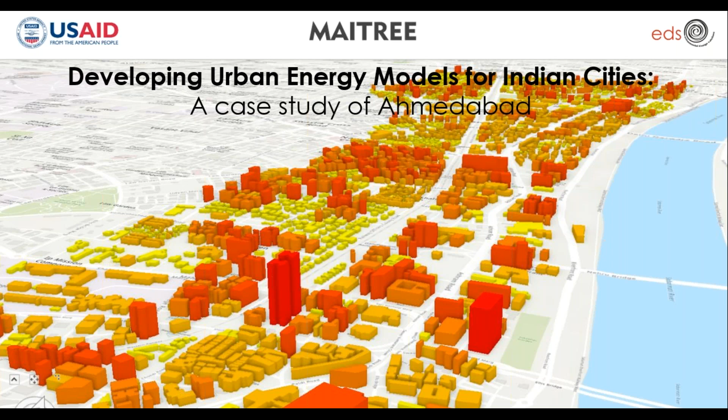Urban energy models, or UEM, are critical data-driven tools to support energy efficient, climate resilient city planning and its operations. They also play a key role in assessing the decentralized renewable energy generation potential within the city, which in turn helps design and operate net zero neighborhoods.

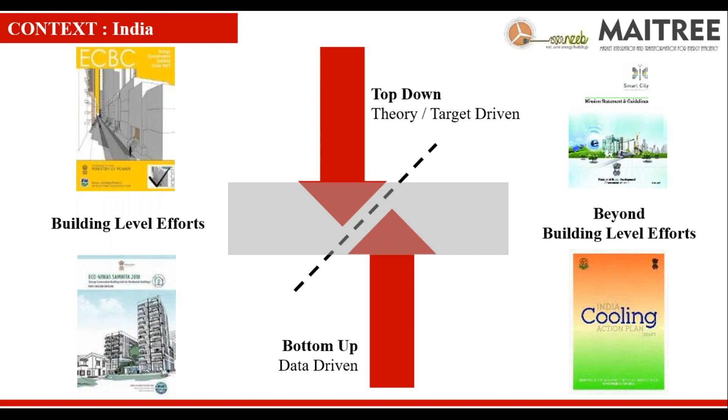At the same time, many of us are also involved in building energy efficiency, net zero cooling. It's trying to sort of bottom up. But many times it happens that top down and bottom up really doesn't come together the way it should. And that's where the gap is. And that's where probably the work which is happening at CEPT, not just in the building energy domain, but many other work, whether it is heritage or transport or water and sanitation, a lot of work where we try to bridge this top down, bottom up, and try to align them in a manner so that we get comprehensive outputs.

Some questions here just to start with, and just to understand where the urban energy model and the work fits in. Do we know how much energy we typically consume in buildings, especially in India? And the answer is sort of yes, we fairly know how much we really consume at the building level. Do we know what is the impact of building energy code at the city level? If I explain that a little bit more, how much carbon emission can be reduced if we implement ECBC or ENS in the city of Ahmedabad or Jaipur or Delhi? Do we know how many buildings we have in a city and what kind of buildings these are? How do they get operated?

If I get a chance to implement a code today in one city or two cities, do I know how many officers are required, how many buildings are coming up which will fall under the purview of ECBC, and per day I need to give a permit to 5 buildings or 10 buildings, or per year I need to give a permit to 200 buildings, and for that I will require about 10 officers?

Or also, do we really understand what is the implication of a code on the regional economy or local economy? I mean, how many people will come forward and start selling insulation or cool roof or even double glazed windows? How many processing units will come in and around Ahmedabad, an industrial area, who will supply a good amount of material to the buildings which are getting complied with the ECBC, and how many carpenters will upgrade their skills, and so on and so forth. So there are a lot of questions which come up when we start looking at the real implication of code in reality.

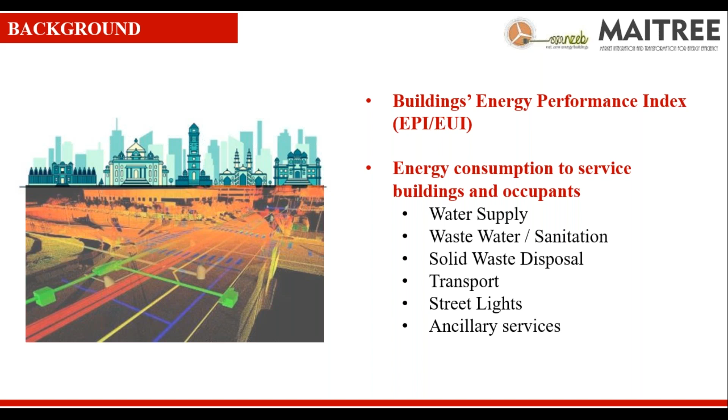But it is not as simple as just converting kilowatt hours into rupees or backward calculating to know how much we are using. It's a little bit more complex than that. And why we need to do that is because cities are still growing. We haven't reached the plateau where we are not expanding our cities, and in fact there are a lot of cities which are also going under urban renewal.

Mumbai is an area where mill lands went into the second incarnation of cotton mills. Now we have huge complexes. Even in Ahmedabad there are certain areas, and many cities across the country are getting urban renewal plans. How do we really operate the cities or municipal services so that we reduce the cost? Forget electricity for a while, but just to reduce the economic cost burdening the municipal corporation, how do we start operating the cities with better services?

And also, I think there are 6 or 7 groups in India who started talking a lot about district cooling systems and so on. And most of the approaches and reports we see are sort of top-down whenever they're trying to make a case for district cooling. Whether it is a small city or large city, irrespective of typology, people do start preaching about district level energy systems. Probably we need to carefully look at all of those.

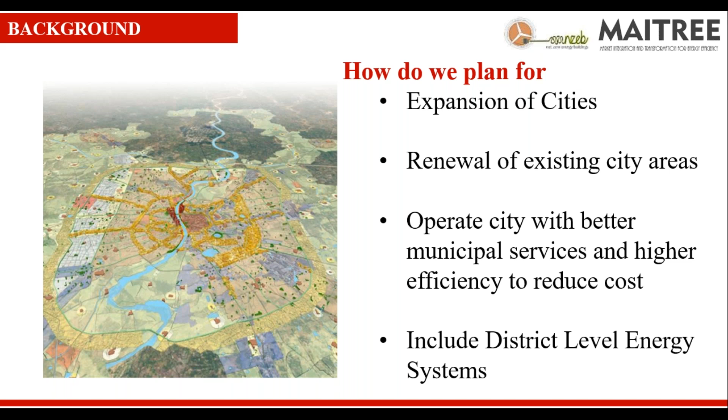As you know, the spatial parameters of cities vary a lot. Urban form in Mumbai is linear, more or less. Delhi is altogether different. A city like Chennai, or those more on the coastal region, have a different kind of urban form. Their morphology is different. The kind of people and habits they have is very, very different.

I won't name an area in Delhi, but at one point somebody was saying that about 700 or 800 liters of water per person per day gets used in one part of Delhi. And on the other side, you just have 35 or 40 liters per day per person. That's the sort of diversity and variation we have. And how do we really service these neighborhoods? Geographical factors are different. Some are flat, some are terrain.

Somebody was telling me that at one point in Mumbai, they were not using pumps to supply water to the colonies, because engineers very early in the development of Mumbai located the water tanks at the neighborhood level high on the plateau, and through gravitational force, the water used to reach even the second or third floor in some neighborhoods. So a lot of these things have an impact on the energy consumption of cities.

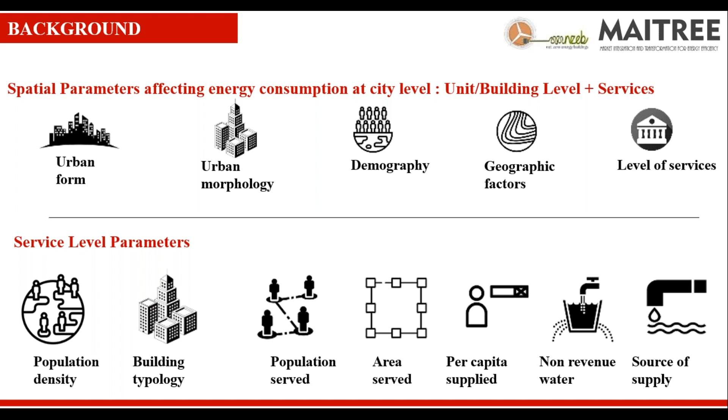Ahmedabad does get water from Narmada and a few other reservoirs, but at the same time, peripheral areas of Ahmedabad do pump groundwater, and that also consumes a reasonable amount of energy. So how do we really account for all these things when we start talking about energy at the city level, energy at the neighborhood level? It's a reasonably complex process.

The urban energy model is basically a computational modeling and simulation of energy performance of either a group of buildings or a number of buildings in urban context. It accounts for their mutual interaction, not just the radiation models, but also how microclimate is going to affect it, and how the urban service infrastructure is playing a role in servicing these buildings.

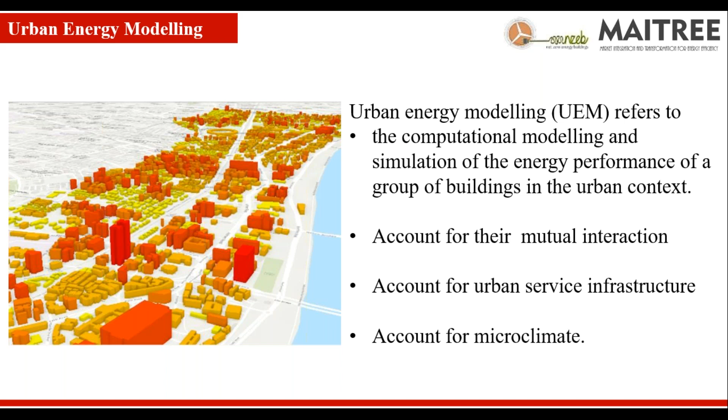And there are 2-3 words people use. One is urban energy model, one is urban building energy model, UBEM, which is primarily to look at just a group of buildings and the interaction between them. But we prefer to use the word urban energy model because we also take urban infrastructure and urban services into account.

And again, this is the kind of work where you can see whether it is a top-down approach where you just look at the market, the economics, the statistics. So there are a lot of proxies which you can use to develop an energy model, whether it is population or local economic growth. Sometimes these are black box models as well.

And if you start looking at physics-based simulation, at the interaction between envelope and HVAC systems, and water supply and water disposal systems, you get a sort of bottom-up approach where a detailed representation of each system and their constitution takes part in an aggregated whole building or whole system level, which is more suitable for urban and regional analysis.

The reason for that is that many times we do not have access to information about the local economy. If I really want to understand the growth of Ahmedabad in terms of economics, it is very difficult to find. At the state level you may get that number, at the national level definitely, but at the city level it's hard to get those numbers. Or even if I want to understand how many air conditioners got sold in Ahmedabad in the last 45 days, the newspapers are saying something, but whether you want to rely on that or not is a different case.

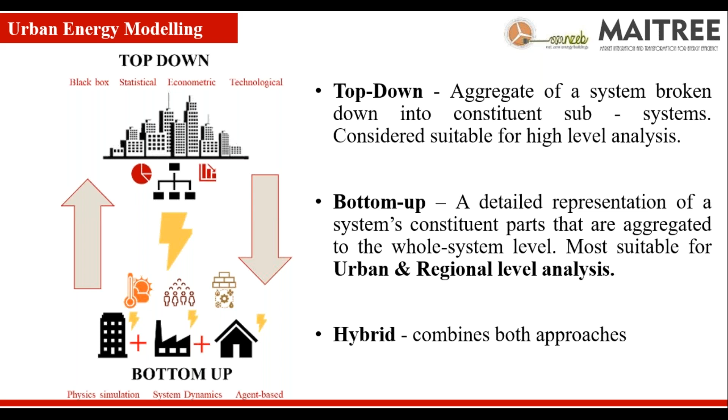While we were doing this, we looked at 85 projects, and this is where my colleague Anmol did his graduation. He looked at about 85 projects, trying to understand why people use these models. About 75% of groups are using building energy models, urban energy models for energy forecasting. So what would be the requirement of electricity or energy in 2030, 2040, in the presence of climate change, 0.5 degree, 1 degree change, how the cooling demand will increase, or even looking at district cooling systems and so on.

About 17% are trying to look at it from the retrofits point of view: what if we upgrade all the HVAC systems in a central business district of one or two cities, what would be the advantage in terms of reduction in emissions, or even rooftop solar photovoltaic, what would be its interaction with the grid, or whether the economic incentives which the government is trying to put will really help the cause or not.

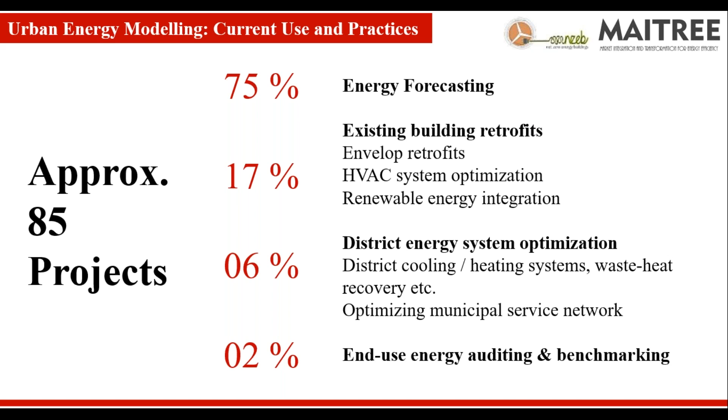About 6%, as I mentioned, were looking at district energy optimization, whether district cooling or heating systems, waste-heat recovery, optimization of municipal networks, and about 2% of them are just trying to look at benchmarking, which I feel is a heavily underused capability. It is very much possible to come up with a benchmarking exercise based on an urban energy model. I'll not talk about that project, but we have started working on urban level benchmarking using urban modeling.

And these projects are more or less across the world, except for Africa, Australia and probably Russia. You will see some of these are being followed either in Taiwan or the eastern side of China, and what we are doing in Ahmedabad. Definitely in Saudi Arabia people are working in this area, especially for district cooling systems. Europe has quite a few projects going on in these areas, and one of them is our partner, UCL.

They have developed a model for the entire London metropolitan region. And then again, on the east coast and west coast of the US, there are some projects going on. Some of them have been achieved in a very advanced stage, and all of them have taken a very varied approach. As I said, it's an extremely nascent stage of work.

So what does it entail? It's basically a database and data visualization on one side, and validation and calibration on another side. But when you want to reach that, on one side you have a model development, which takes care of what is the information you need to put inside the model, whether it is archetype development or classification of buildings, what kind of buildings they are, and how do you really calibrate the energy models of those. And I'll talk about level of details in a while.

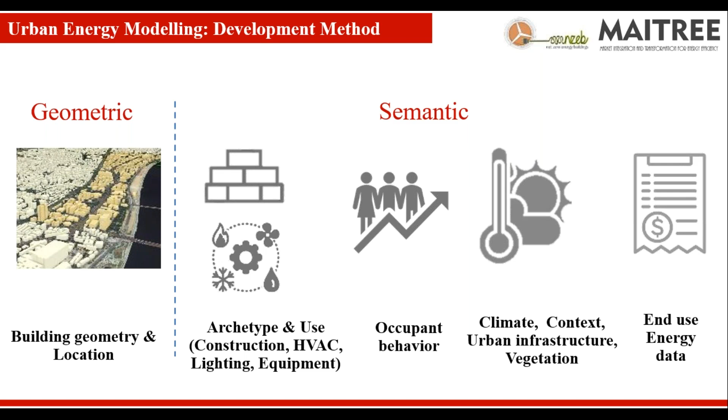In what climate you are working, is there a presence of vegetation, is there a presence of large gardens, is there a presence of a river next to you or any other large water body, and also trying to look at in the present context what is the energy use and energy use data, and that happens through survey at some point in time. So there are two big baskets of inputs, one is geometric, one is semantic, and counting all these, I'll talk about what we are doing in Ahmedabad.

The next slide is going to be very busy, so I request your attention: for an urban energy model, what is required and what are the sources from where you can get inputs. In fact, the information which I'm sharing in one slide is a work of about 4 to 5 months, and it can be developed as one full-scale PhD.

But what we are doing is looking at what is the availability of the data, what is the accuracy of data, can you really rely on that? So the lack of quality of the data, or sometimes you get data which is not usable in a computer directly, so it's not digitized data. Sometimes you do get data, but it has a privacy regulation or some kind of use restriction on that, and sometimes they are not available.

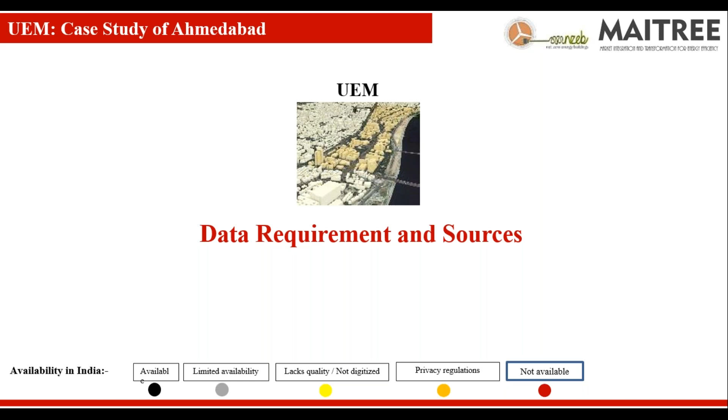So looking at what is required in an urban energy model, some examples: you can rely on Google Maps. There is a GIS portal of the Government of India called Bhuvan portal. Some voluntary organizations also work on CityGML or OpenStreetMap, or you can rely on the Estate Department of the Municipal Corporation, which has master plan documents, or urban local bodies' registers, or sometimes also state level census.

Sometimes they are available. So available data is all in black, limited availability is gray, lack of quality, where you can't rely on data, is yellow, privacy regulation orange, and not available in red. So that's one source of example.

Another source of example: a lot of projects, like USAID did the Eco3 project, where they got a number of commercial buildings' data. CEPT did a CBERD project, and also the GBPN project, which has residential data. BEE conducts surveys. So sometimes they're available, sometimes they are not, not in the best of the form which you need. There are some independent market surveys people have done, and also the TMY files or EPW files, which are available in the portal.

For geometry data, basically you rely on a geotagged GIS map, and here it is not just a plot boundary, but the form of the building. Plot boundary is still possible to get from GIS and from the municipal corporation, but what is the form of the building right on top of it? How much height does it have? All that is sort of not available.

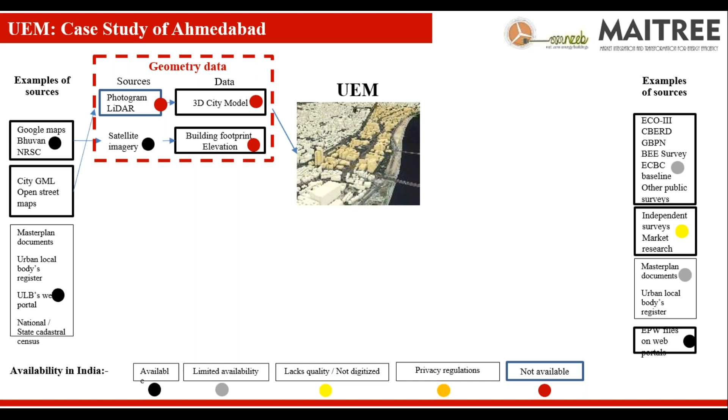So you need a third dimension of buildings when you talk about an urban energy model, because that's where the importance is. Sometimes you do get building level information about the plot size and plot area, and what is the use of that plot, whether it's a commercial building or residential building, what is the floor space consumed.

But again, that would be, I would say, more like non-spatial data. It will be more like an Excel sheet. Many corporations do have property tax data. In fact, now after the 73rd or 74th amendment, a lot of ULBs, urban local bodies, do maintain property tax data. Whether you can use it or not, it's a different case.

Energy data, definitely some of it is not available. One needs to do the survey. Utility bills are very difficult to get at scale. Yes, 200, 300 buildings is possible, but if you ask the utility to give you data at a large scale, there are a lot of privacy regulations and privacy issues there.

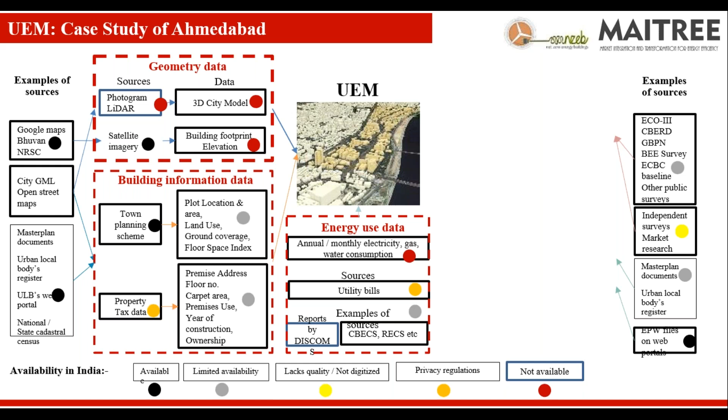Discom data at the grid level or a feeder level is possible, so at least you know when the city is hitting the peak, or when one particular grid or one particular feeder is reaching the peak, and so on and so forth. But again, it is not very much useful. It's still limited data. In terms of archetypes and building occupancy data, it's not available. One has to do a ground survey.

And urban infrastructure, I would say, especially with some of the work happening at the central level, a lot of cities have started gathering the data, whether they use that data appropriately or not. Because of the installation of SCADA systems and many other automation, a lot of data is available, primarily from municipal infrastructure or urban infrastructure.

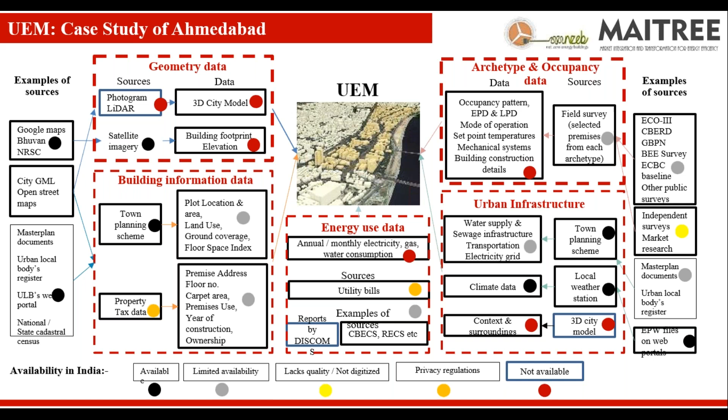So that's a reasonably busy slide, but it talks about how much is required, at what granularity you really need to have it: daily, hourly, monthly or weekly. All depends upon level of detail. At what level you need to go and work, at what accuracy you want to work. And that's where I want to spend another 2 slides helping you understand what level of detail is.

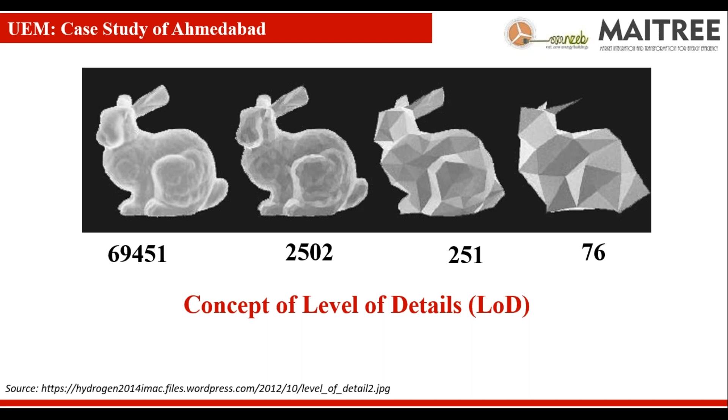So the concept of level of detail is that if you have up to 76 polygons, you may get a very rough form of something. Difficult to figure out whether it is a cat or a rabbit or some other animal. But once you start increasing the polygons, level of detail increases. That means it is easier to predict what animal you're talking about. And if you translate that into a building, we call it level of detail 1. There are sub levels of detail available, but I'm just talking about 4 high level ones.

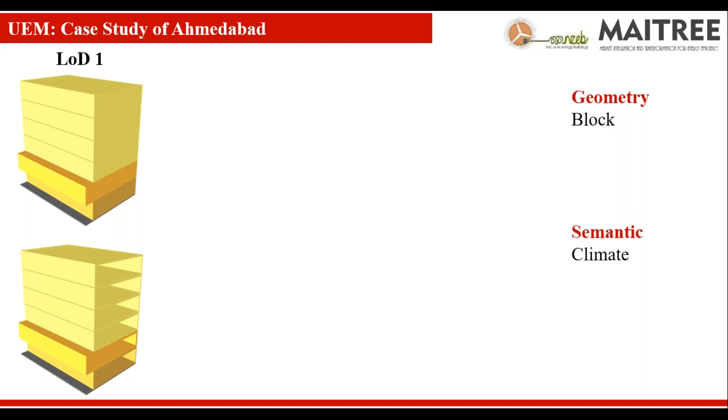When we talk about level of detail 1, and this is generally understood in the sector, when I say this particular energy model is at level of detail 1, people will understand we are just talking about a block level and climate. It does not talk about anything beyond these 2. Level of detail 2, you have a little bit more refined geometry. You know that the first 2 floors are retail, commercial, and upper floors are residential. You also know the envelope characteristics, when it was constructed, 2020, 2019 or 1980. Based on that, you can figure out what kind of construction it would be.

Level of detail 3 is where you have a little bit more understanding about occupancy. When people are occupying that thermal zone, whether it has a shade on top of it, what window to wall ratio you have. So a little bit more defined geometry, and also understanding of occupancy.

Level of detail 4, where you actually know the internal layout. You can find which are air conditioned zones, which are non-air conditioned zones, whether it has solar photovoltaic on top, and what its orientation is. So you can also find what the generation capacity would be through those renewable energy systems. That's level of detail 4, and it talks about things very much in detail.

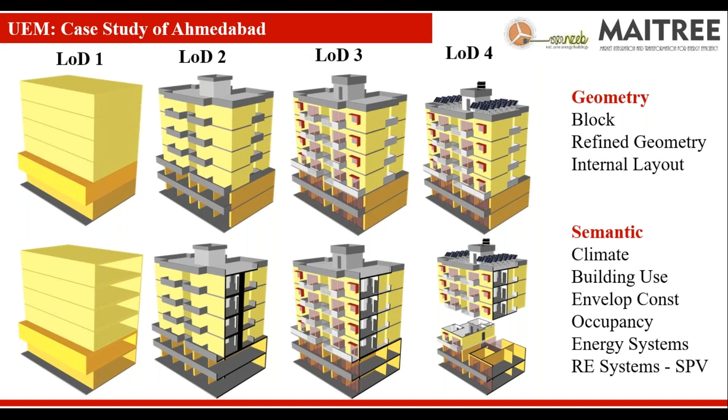Not necessarily every time you work at one of them. Sometimes some area you have level of detail 3, and sometimes level of detail 1, and still you can move forward with the studies. So for intermediate levels of detail, there's a word which Anmol used a lot, which is fit for purpose. What is your purpose and how much detail do you want? Not necessarily every time you need everything.

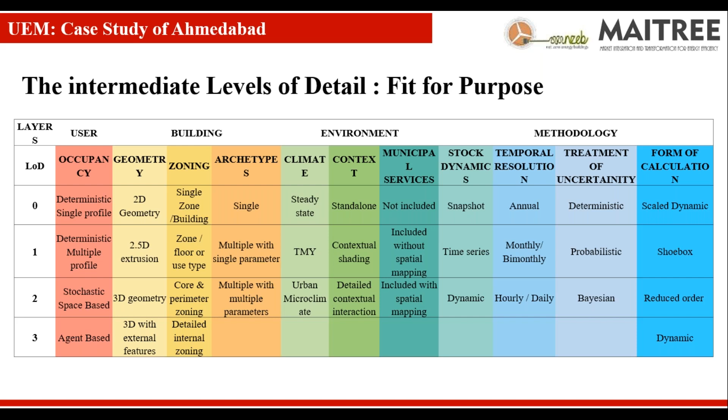If you just want to look at the urban heat island impact, you are looking at the surface temperatures only, not the internal spatial quality and so on. So whether it is a two-dimensional geometry, which is spatial, or 2.5-dimensional geometry, which is non-spatial, more like an Excel sheet or CSV file talking about the height of the building on that particular plot, that's what we call 2.5 dimension. Then you have 3 dimension, and 3 dimension with external features such as trees and other features found in the city. This is what we call fit for purpose, and what matters is what the purpose is and what level of detail you go into.

The simulation methodology we generally adopt is sometimes reduced order. About 29% of projects have adopted this so far, where it approximates the complex simulation with mathematical equations and correlations, using statistical and machine learning tools. CitySim Pro is one example, or City Energy Analyst is another example. They use reduced order models.

Then there are tools like Energy Plus, Open Studio, or Design Builder. They look at archetype-based approaches and scale up results to a total area of typical simulation. Basically, you simulate one type of building. For example, ECBC has 16 types of buildings which EDS worked out, with a baseline case, and then you apply that. You figure out how many commercial buildings you have in the city, then apply typology A to 3,000 buildings, typology B to 1,200 buildings, and so on.

So it's a sort of scale dynamic model. About 20% of projects happen on those lines. Some are also shoebox models, just at the building block level, or even at the plot level, whatever the plot boundary is becomes your building, and you look at representative zones. MIT works on this with their UMI tools. Finally, about 50%, which includes CEPT's work, is on a dynamic model that simulates each building individually with contextual effects, looking at interactions between 2-3 buildings in terms of shading, heat exchange, or radiation models.

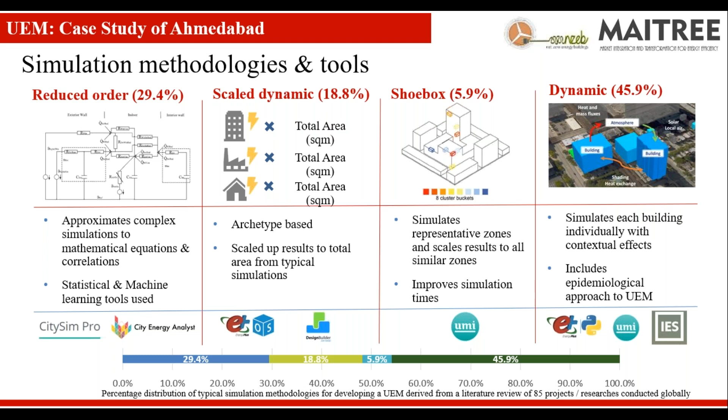One of the first tasks is to understand how many buildings you have in a city. Just a city map with plot boundaries, or even a Google map, doesn't really tell you what you want to know. You either need a photogrammetry reality mesh where you can see what kind of buildings you have—sloping roofs, high or low buildings, what material was used, including window to wall ratio—or you look at point cloud models from LiDAR, capturing the entire area through a LiDAR survey to understand the impact and kind of city you're looking at.

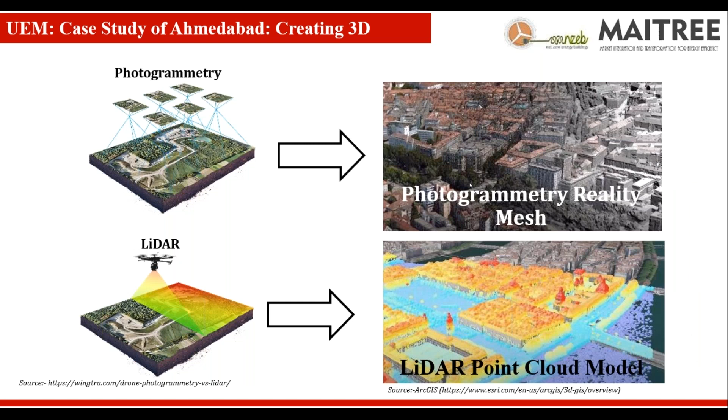What we do at CEPT is use a hybrid model between photogrammetry reality mesh and LiDAR point cloud. We fly a UAV across the city—Ahmedabad is around 400 square kilometers, not a very big city—but due to certain restrictions we can fly only in certain areas, because of military cantonments, airports, or other sensitive areas. What you see on the left-hand side is a grid where we fly the UAV, using a lot of computing power to capture data and also to analyze it. It is definitely resource intense work—economic resource, computing resource, time resource, everything.

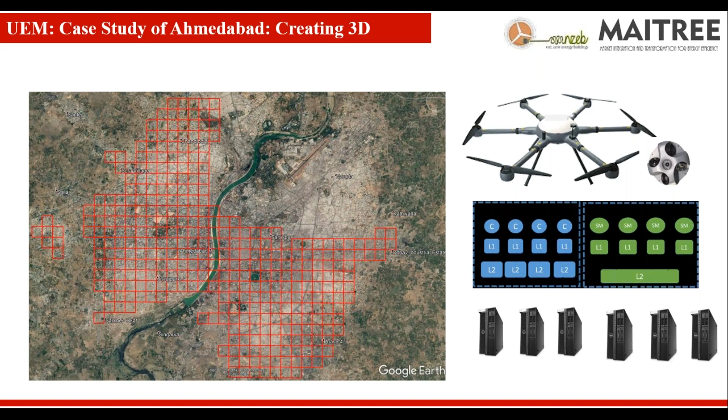One example is the small area next to the Sabarmati riverfront, where you see the unmanned aerial vehicle drone flight path. Basically, we did mission planning, and what you get finally on the right-hand side is a photogrammetry model.

The way we work is that since we want to understand the window area, construction details, and shading practices—which are very predominant in this part of the country, including balconies—we take the precision to about 100 mm. We capture data so precisely that even a 230 mm or 100 mm thick brick wall, whether the window is placed on the outer or inner surface, we try to capture that level of detail. When we go to the old city, where buildings are packed in a very close-knit fashion, we may increase the level of detail even further.

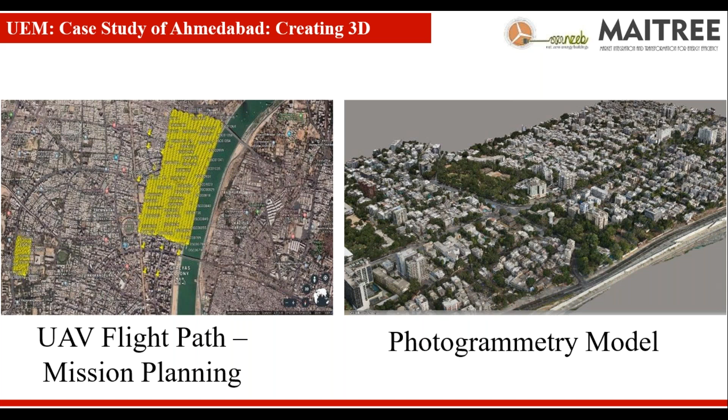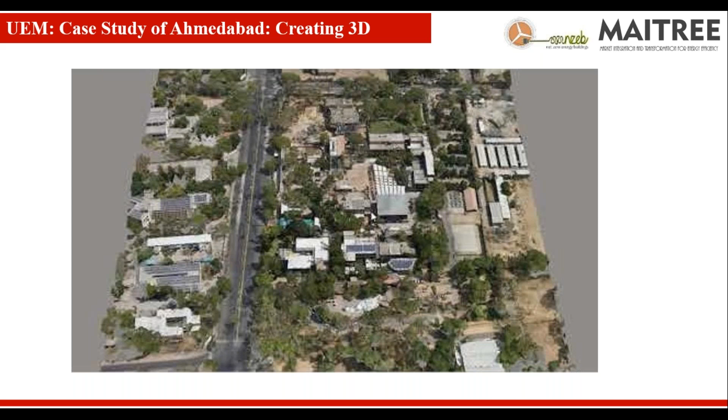What you see is again sort of accuracy. This is a raw model, not at all a processed model. This is a simple three-dimensional photographic representation of the CEPT campus. Once we have that, actual computational work starts.

A lot of quality assurance and quality check happens before we start making a model. We rely heavily on machine learning and artificial intelligence tools, and also try to work out the 2D and 3D extractions.

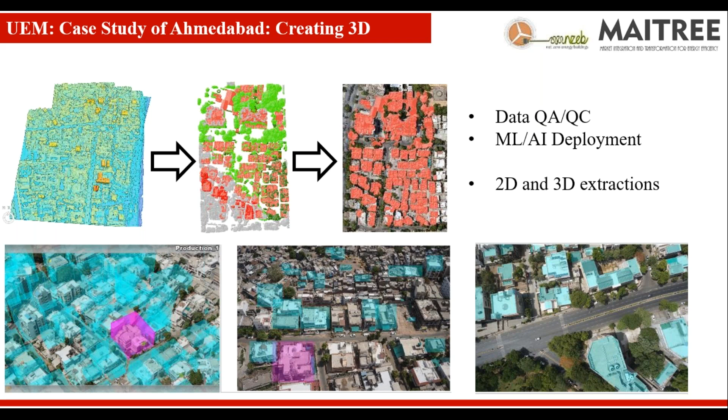Once we do that, in parallel we are trying to work out how much floor space we have in a city which is conditioned, or something which is naturally ventilated and unconditioned. To do that, we again rely on some of these tools.

Definitely, it's the power of computational power and information technology, where image recognition and thermography come together, trying to figure out what would be the window to wall ratio. And again, a lot of quality check and quality assurance needs to happen.

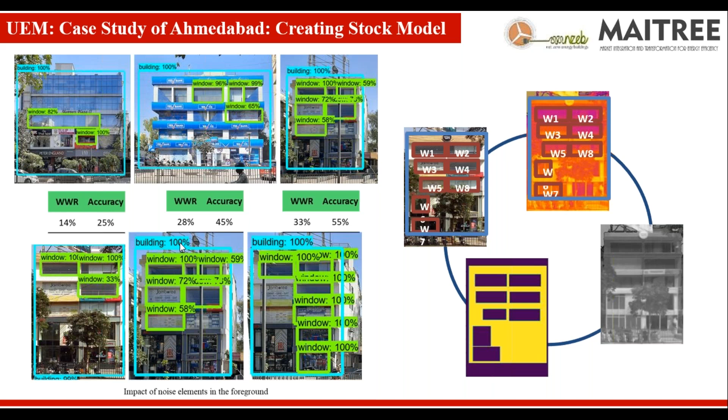Even a tree coming in between will mean it will not pick up the window area, or a street pole will cause a problem. So increasing confidence in your model and trying to understand how much floor space is conditioned is important.

For that we use thermography - more than X delta surface temperature difference means it is a conditioned building. Thermography does pick up a high variation in outside surface temperature, especially where there is glass.

If the building is completely a boxed building without any windows and completely air conditioned, we will not be able to pick that up. But the moment we can see a window and a surface temperature of the window, we do pick that up as a detail which we need.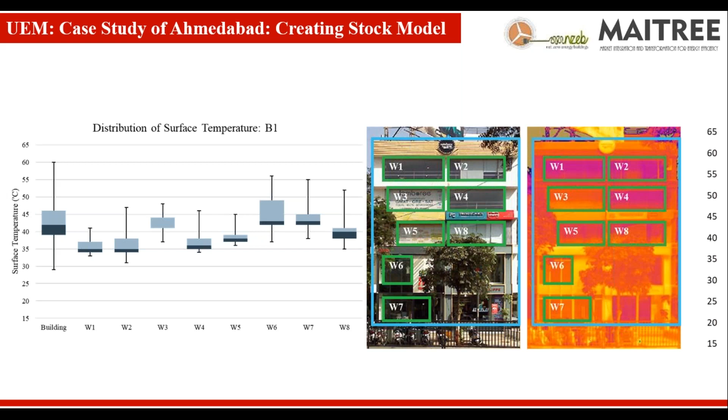And then everything goes into the model. Occupancy schedules get defined at the entire region - equipment, lighting, glazing, construction templates.

And then we run it - basically it's Energy Plus, we create the IDF, and then run Energy Plus and Python together, using the model developed by UCL Energy Institute in London, which they use for the London metropolitan region, called SimStock. We use that to run the energy model for Ahmedabad.

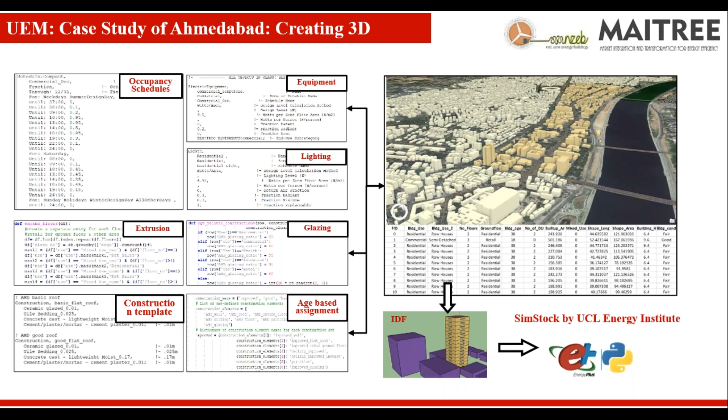Now, when we do that, we are just dealing with one area, which is just the building. But what about the other municipal services? That's where the real challenge is.

If you look at Ahmedabad, it has a few administrative zones, but not necessarily does one pumping station serve within that zone, or one water supply station serve one administrative zone. A lot of overlap happens - there could be one command area of one pumping station, but wastewater disposal will have another command area, and solid waste collection will have yet another command area. So that's where things become complex.

This happened because of the organic growth of a city. Definitely there would be town planning schemes, but engineering services don't really follow the town planning schemes, and the way some of the areas get developed. So as you can see here, on the left hand side you have the administrative zone, but on the right hand side you have various command areas - just one example being the water supply command areas of various pumping stations.

That one pumping station, if you can see that little lighter blue color, the way somebody needs water supply, and if capacity is available from that pumping station, they will go and supply there, whether it is meeting the administrative zone, the electoral zone, the postal code numbers, and so on. It doesn't matter.

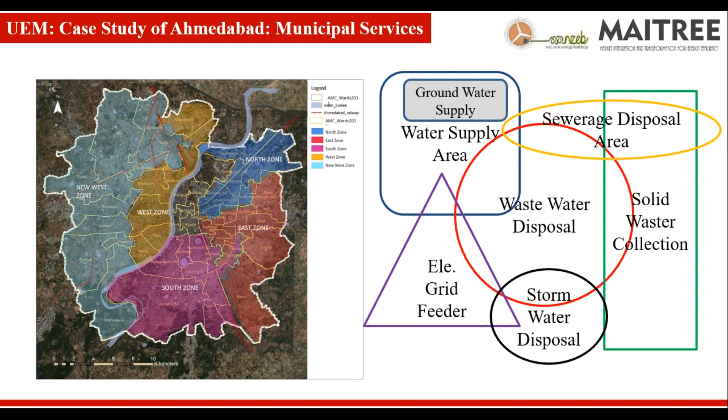So matching these various services I was mentioning here, and that too spatially on the city map, is huge, and machine learning and artificial intelligence really doesn't work there. One really needs to map this for high accuracy.

So when we do that, fortunately, after mapping we become a little safer, where we know how the water supply works. I'm just talking about water supply as an example here - either you have groundwater or surface water, from either Sardar Sarovar Dam or another dam north of Sabarmati, whether it's coming from Dharoi Dam, and then various water treatment plants, whether it is Kotarpur - this is all area in Ahmedabad where we have water treatment plants. Those water treatment plants serve the water distribution station where we have a SCADA, and we access that SCADA to understand whether it goes to overhead water tanks, and what are the command areas for those.

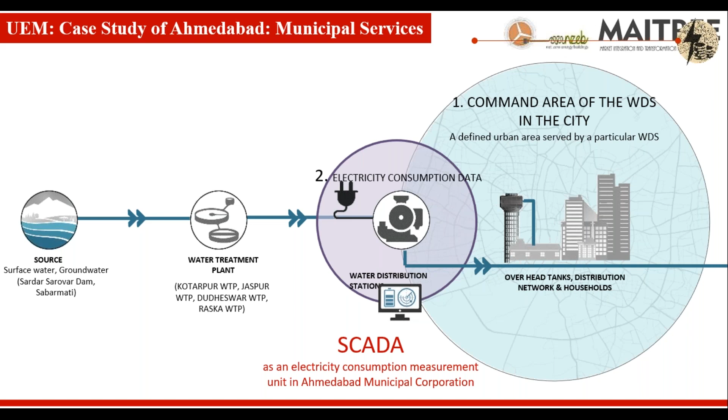And in that command area of one water pumping station, what kind of buildings do we have, whether it is predominantly large housing colonies or central business district, and then try to correlate that with the floor space available, with the kind of use available.

So basically, a number of ways by which we start looking at the relation between a command area and electricity consumption, whether it is a large command area or small command area, relationship between meter cube of water supplied and electricity consumption, so with the various distribution zones again.

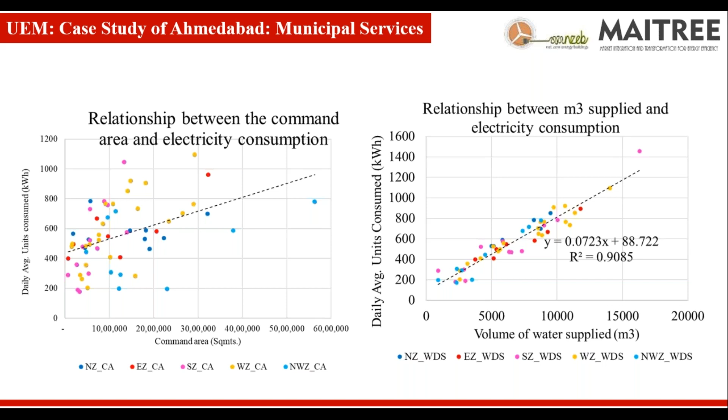So that's where the real work happens, where we are trying to put the energy model coming from the building and putting the municipal services on top of it. We are sort of halfway, or a little more than halfway.

We have also started developing a dashboard which talks about how this information would be used and communicated. What you see is plot boundaries of Ahmedabad with the road network. These are some of the screenshots which I'm showing you.

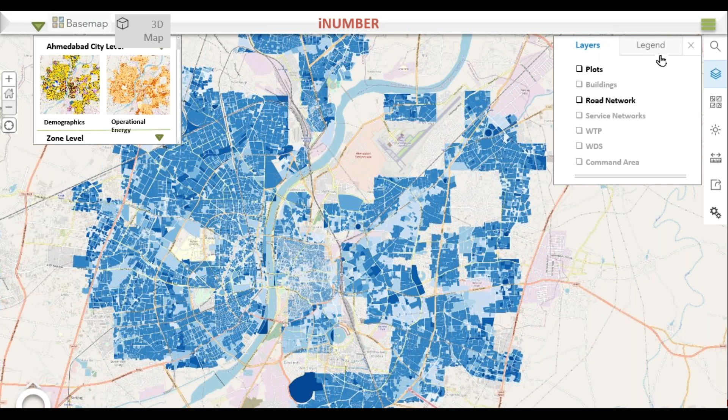And then you want to see that water pumping or water distribution station 1, which is Navrangpura area - what is the size it serves, how many pumps does it have, what is the operating hours of that pump, and how much annual water supply in terms of kiloliters it has, and then trying to look at that with some other water pumping station and their command area.

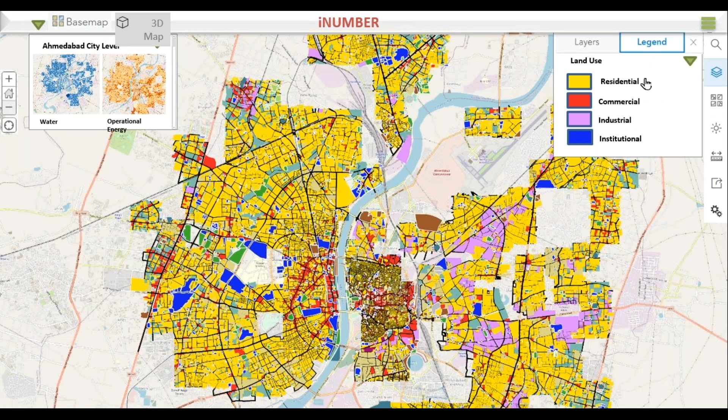To make sense that, okay, high-rise buildings, low-rise buildings, and this is what the actual EPI of predominantly bungalow settings, or high-rise apartment settings, or low-rise apartment settings is, comparing two water distribution stations, trying to look at land use, and then trying to look at what happens in that area in terms of 3D stock.

What you are seeing is level of details 2 or 2.5, where each building has its own characteristics in terms of construction, in terms of heights, and trying to understand what is their water consumption per day and what is their energy consumption or EPI, and then trying to correlate whether that particular building has what consolidated EPI.

We still have not coined the word for what you call it - EPI, whether it is consolidated EPI, or urban EPI. We're still debating what it should be called, but it will be in coherence with the terminology which we use right now. It's called EPI.

And then finally trying to look at what happens in the building, whether it's an old building, new building, how many people are there inside the building. So basically at the building level understanding and the end-use level understanding.

Definitely all of this does require a reasonable amount of calibration. It requires not just a simulation, but validating the data with the occupants, or either with the grid, or with the utility data, or with the municipal property tax data, and so on.

And then trying to understand - this is one work which another friend, Nikhil, is trying. This is an urban renewal plan of the central business district of Ahmedabad next to Sabarmati riverfront, between two major bridges, which is on Ashram Road.

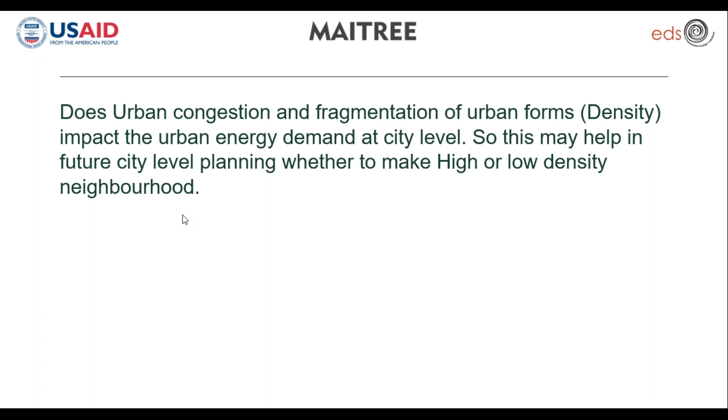And what I'm talking about is just Ahmedabad. There's another project, at least another group of CEPT, for 400 cities in India, talking about what the benchmarking is for water supply and so on and so forth. So a lot of work needs to happen before we actually put a pin on the matter and say because of these we are asking for high rise low density or high rise high density.

Any interesting observation about the part-time occupancy in certain areas, such as the CBD, which have high? No, I don't have an answer to that. If you want an answer to that, it's very simple.

You just log on to some of the utility data, and you will be able to find. I think IIT Bombay did a work sometime back looking at what happens in a holiday and what kind of holiday it is. So for Ahmedabad, they did come out with that. During the normal work days in Ahmedabad, there was whatever energy consumption, but because of Uttarayan, the kite flying festival, and that festival happened when we had a cricket match or some final, the peak was more than the peak of the year. So probably you need to look at some of the utility data to get that out.

Is there any research work or case study available publicly? The application? No, right now, no. There are some papers available on this project, which will tell you what we are doing. But this work is happening at a district cooling system. As I mentioned, we have not done much work, but this can definitely be connected with district cooling. And so far, in the kind of reports I've seen in India, people really don't work at this level, or a combination of this with district cooling. So that's a lacuna, a gap which we are trying to plug.